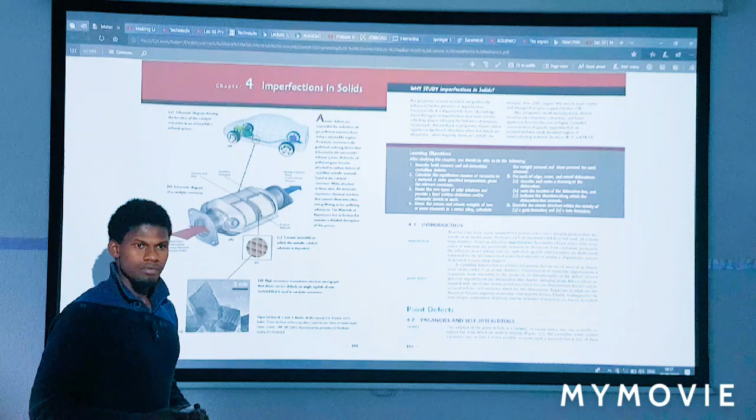Yes, and here, this is an example of what I'm talking about. We need to have control. Look at this. This is an automobile car.

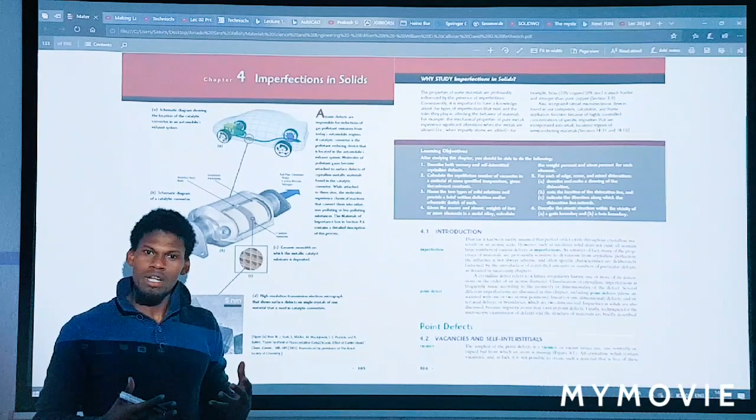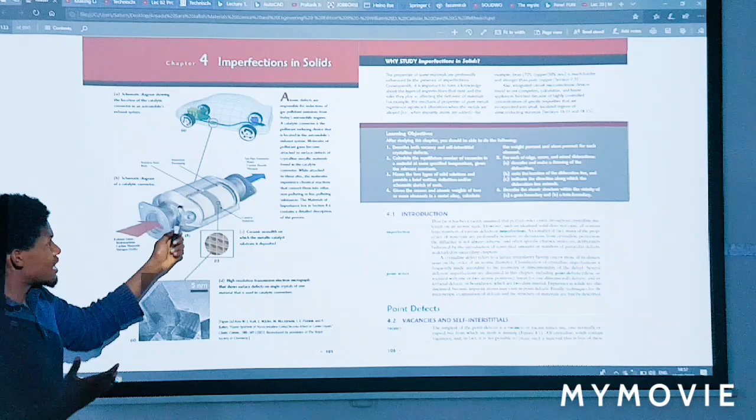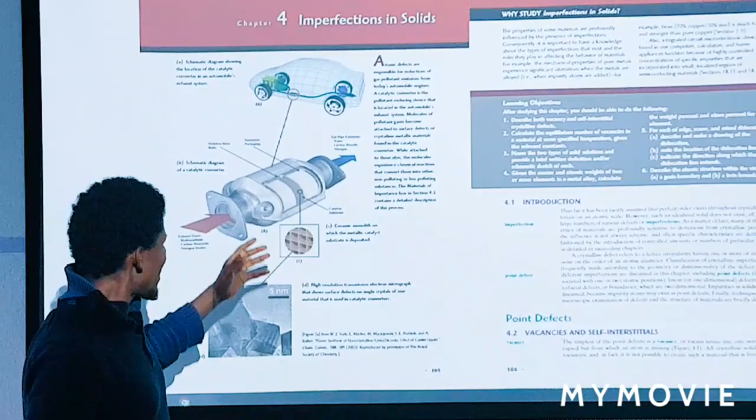During automobile use, we have a lot of gas emissions, and this climate change that we are having. Every car is producing some emission that is affecting the ozone layer. So what material scientists and engineers have done is create a catalytic converter, through the understanding of imperfections in solids, to convert these gas emissions so that they cannot destroy the environment. This is exactly what I'm telling you about. That's why you need to learn imperfections in solids, because when you learn this, you can control these situations so that we can reduce climate change.

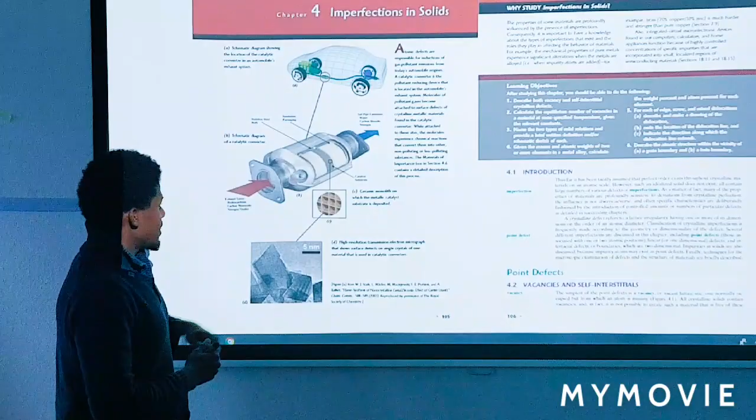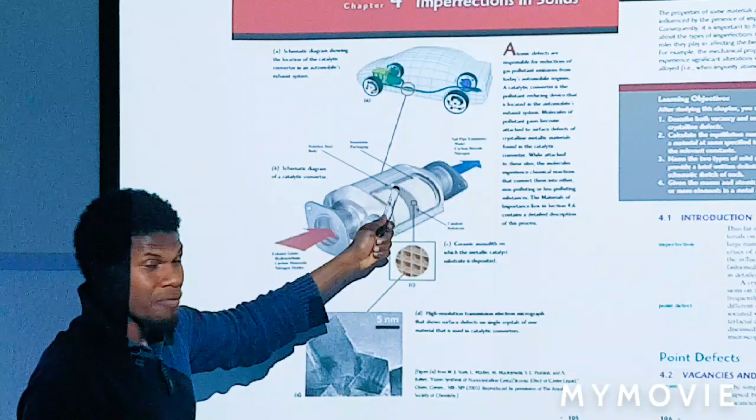Let me give you an instance. Here is the gas, the poisonous gas. Here is the car, and the gas is coming out from here. We get this catalytic converter. What materials are they made of? It's made up of steel and ceramic material. You can see that, and here is the insulating package.

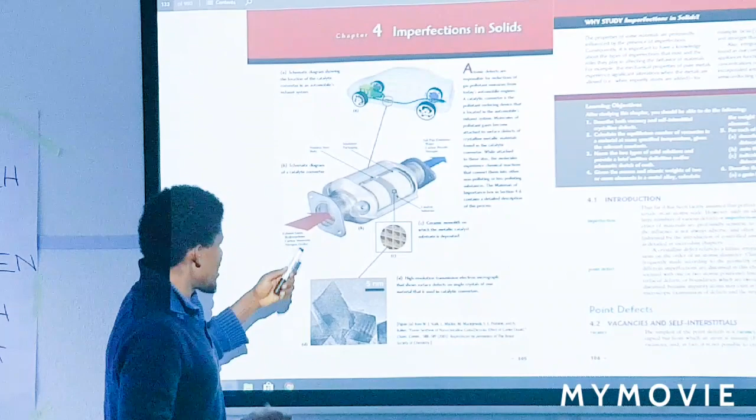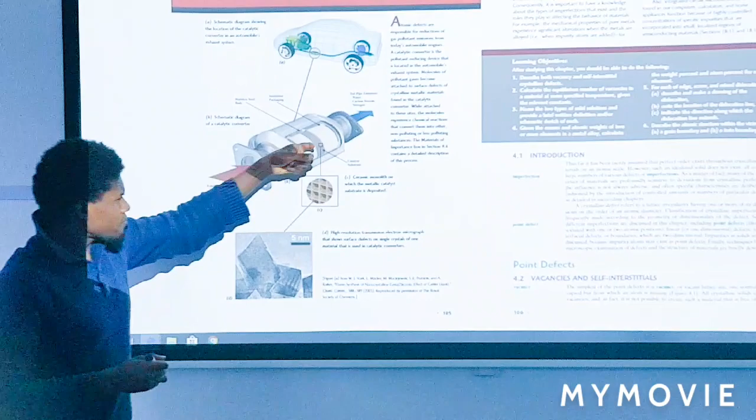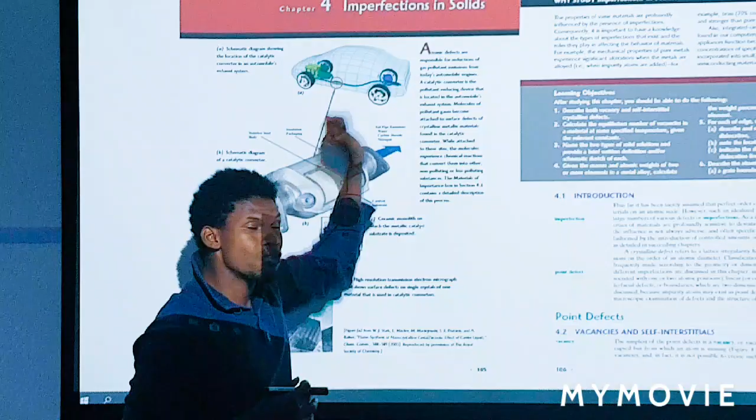So the gases, the carbon monoxide - we know carbon monoxide as a poisonous gas - and other nitrogen oxides, they go through this catalytic converter, and there they undergo some chemical reactions. The molecules of these atoms can stay here, and through this process they undergo chemical reactions. These chemical reactions are made possible because of atomic defects, which we're going to see. Then the gas comes out as water or nitrogen.

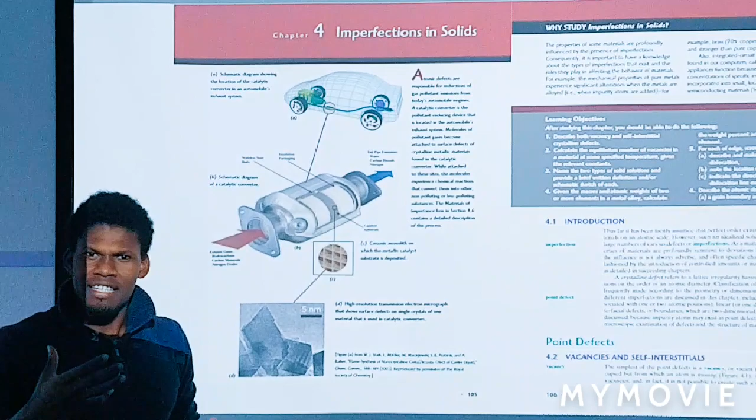So that's why when cars run, you see some little water coming out. This is the beauty of understanding imperfections and atomic defects.

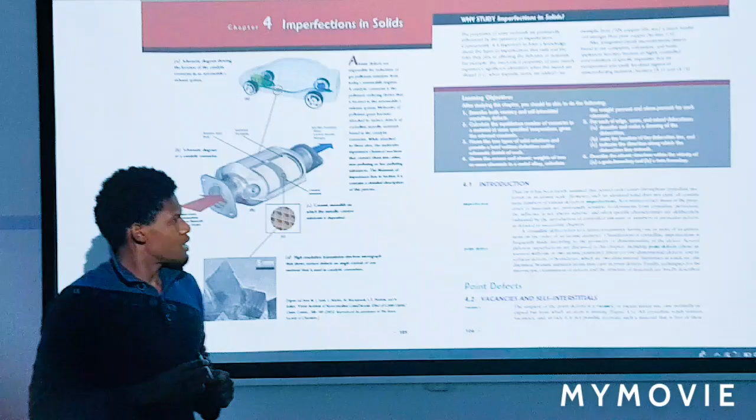Another example is in our mobile phones, computers, household machines, everywhere. If we understand, right from the atomic level, the importance of imperfections in solid materials, then we can design materials to meet our daily needs. We can control these materials. That's why we should study imperfections in solids.

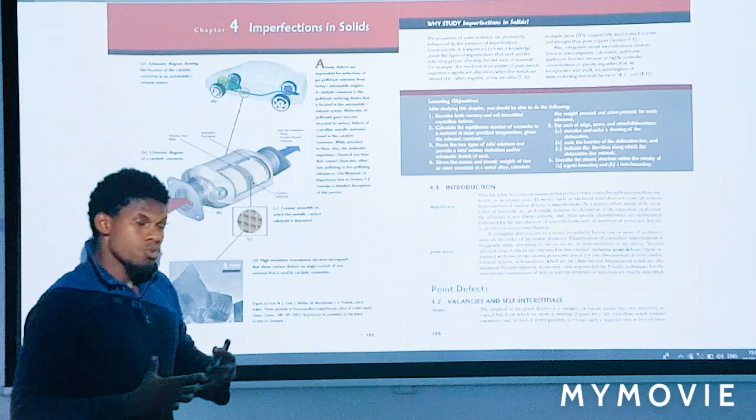These imperfections dictate the properties of materials, and whatever dictates the properties of a material, you should be able to study these properties, these structures, and how these materials perform. The only way we can manipulate this is by studying these things.

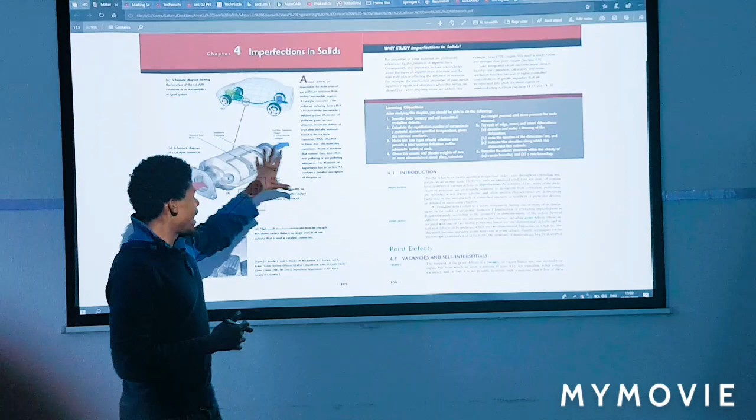So here is our learning objective. What are our takeaways? What can you take home with you when you study material science and engineering, especially chapter 4, imperfections in solids?

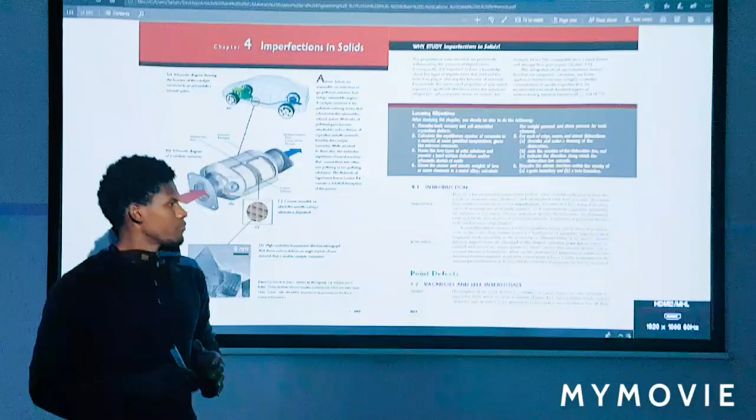Number one, you should be able to describe what vacancies and self-interstitials are. I know most of you are familiar with what a vacancy is, right? When you're looking for a job, for example, you go out there, you search for a job, and upon this job, when you are looking for a job, you have vacancies.

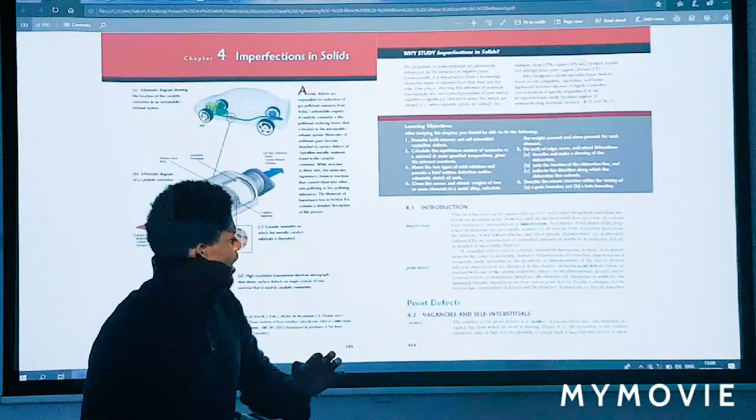All along in chapter 3 we talked about polycrystalline materials and single crystal materials, and we said that materials are perfect, but this is wrong. There is no material that is perfect without some vacancies. So we're going to see vacancies and self-interstitials, and we should be able to calculate how many vacancies are present in every material, how many defects are in there. You should be able to calculate these things, because only then can you control how these vacancies affect the properties of these materials.

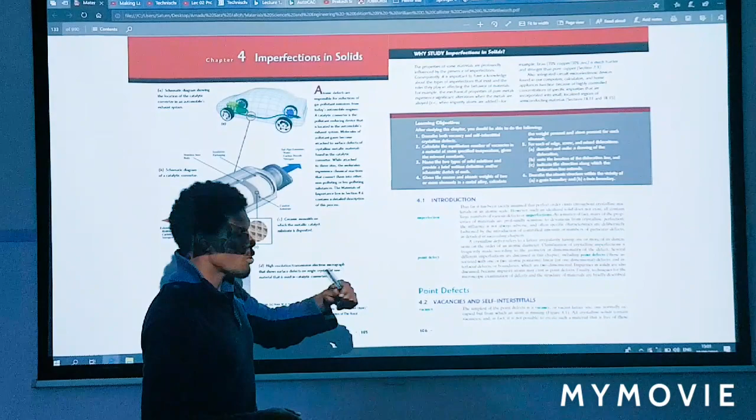So that's the takeaway we're going to take with us after we finish studying this course. Another thing is solid solution substitutions. We have, for example, a simple analogy with water.

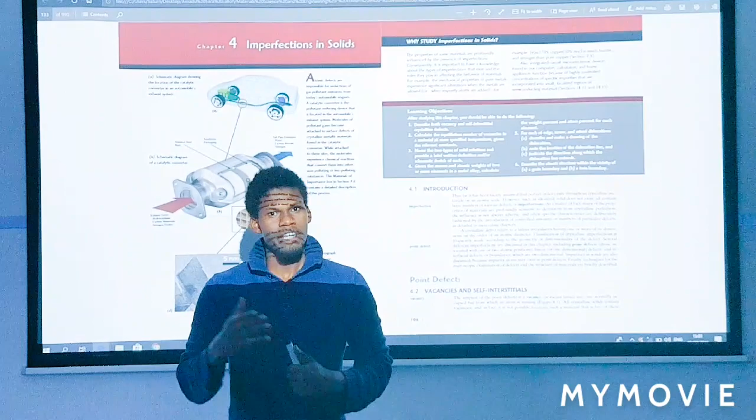If you are mixing water with alcohol, you cannot differentiate it until you taste it. Then you know that yes, there is a mixture. It's the same thing with solid materials. We can mix two solid materials, like copper and zinc, to determine that.

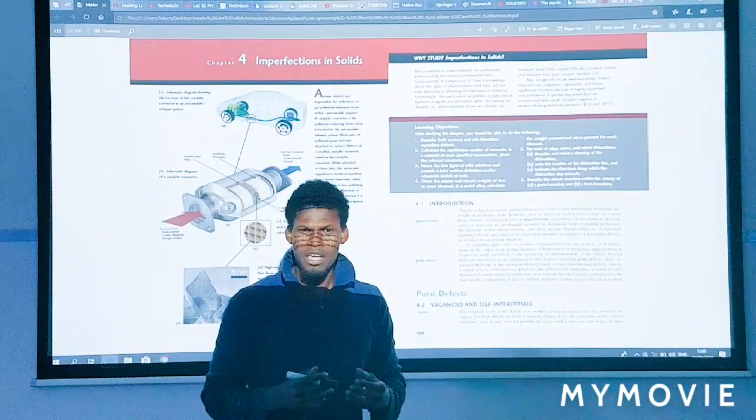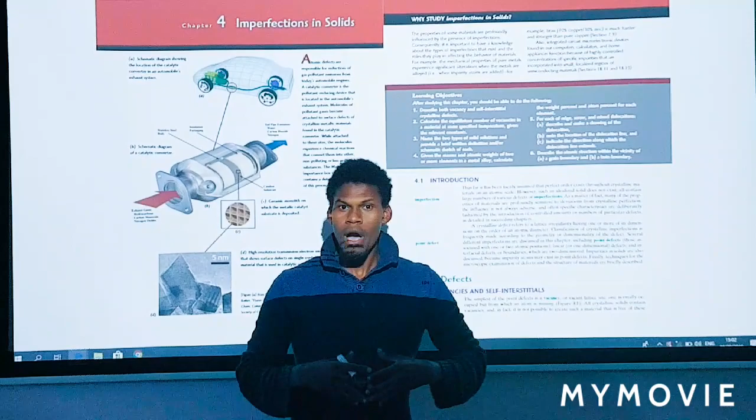Another thing will be the masses. How can you calculate these masses? It's very important. For example, if you mix copper and zinc, you want to know how much copper you have within this material and how much zinc. Because when you combine these two, you have an alloyed material. So you should be able to determine the weight, or the number of atoms that are within this material. That's the takeaway we should have.

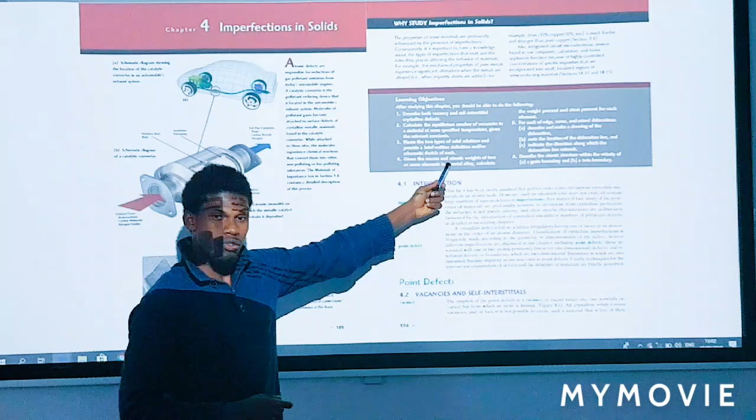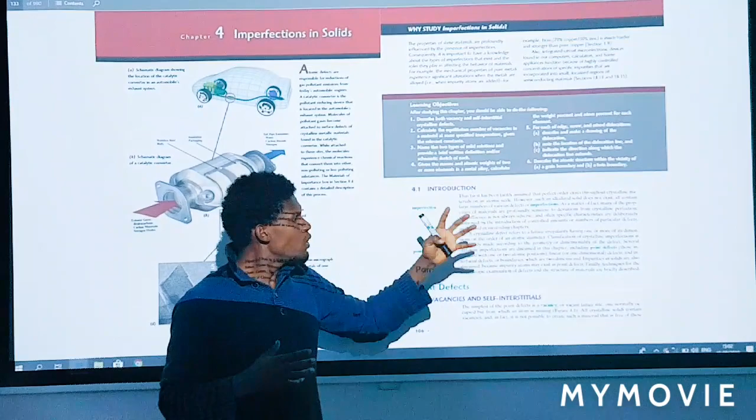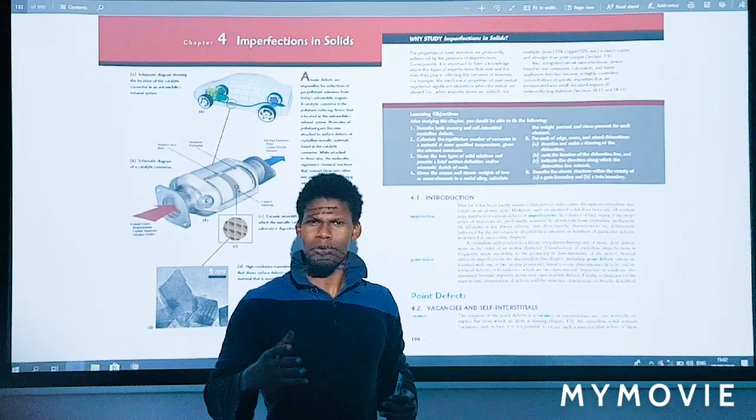Another takeaway will be defects. We have edge and screw dislocations. You should be able to calculate these things and mixed dislocations, so only then can you understand these imperfections and try to control them. We're going to talk about grain boundaries and twin boundaries. These are very important because we know as human beings we have what we call twins, right? This is the same thing that is happening in materials, so this will even help you with some analogies to understand what is happening in our life.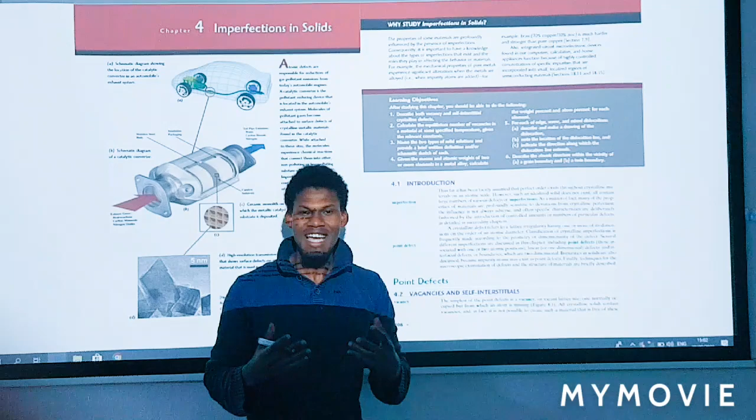Now we start with vacancies. Here is a typical example of vacancy and interstitial.

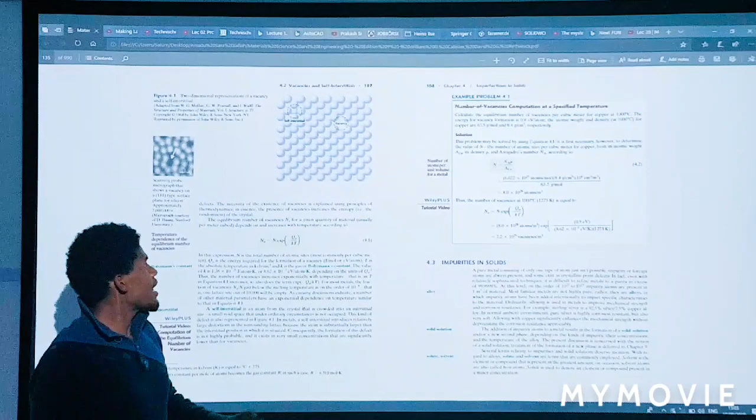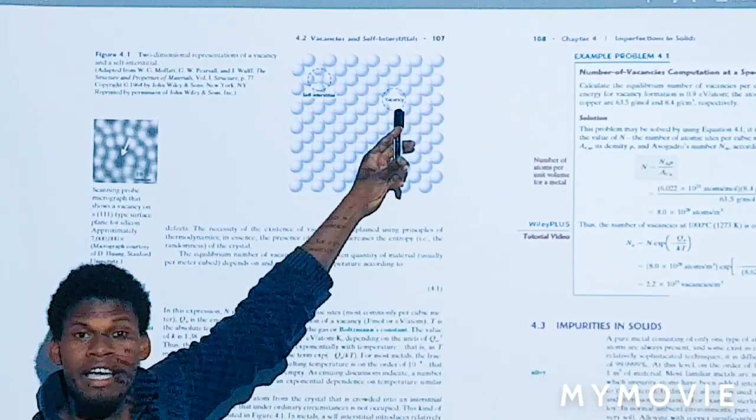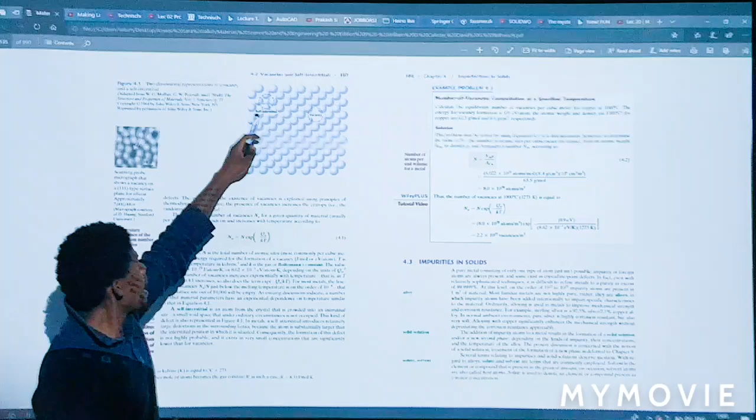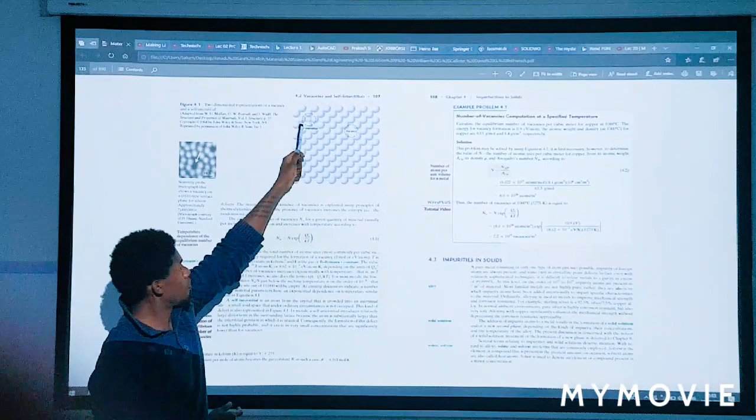A vacancy is, if you look at the atoms arranged in a pattern, but if you look at this point here, an atom is missing. So when an atom is missing, we say there is a vacancy. In some cases, these atoms you can find somewhere else. If you look here, there is an atom here that's not supposed to be here, so we call this self-interstitial. We call it self-interstitial because this atom here is the same as the other atoms, but here there is no atom where there's supposed to be one. So we say these are vacancies.

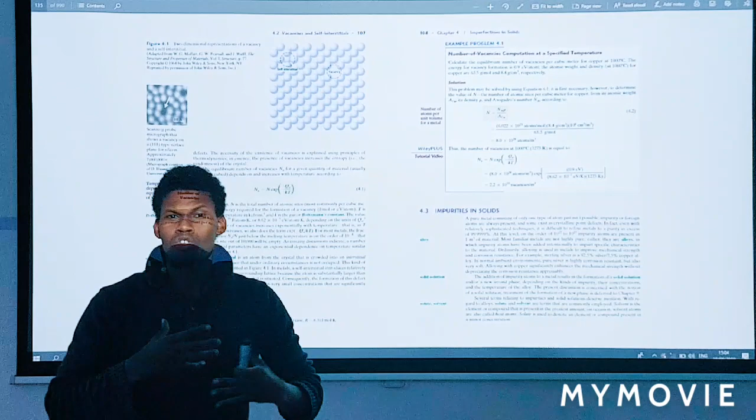Within a material, we should be able to calculate how many of these vacancies are here. So how can we do that? First, we need to come up with some mathematical equations to calculate the number of vacancies, and for this we need a little knowledge of thermodynamics. The principle of thermodynamics here is just the measure of entropy, and entropy is just randomness, how things occur randomly. With this vacancy, because the atoms are vibrating, an atom will try to occupy this space, and when an atom comes here, the vacancy will move over there, and so on for the next atom. So we can calculate these vacancies.

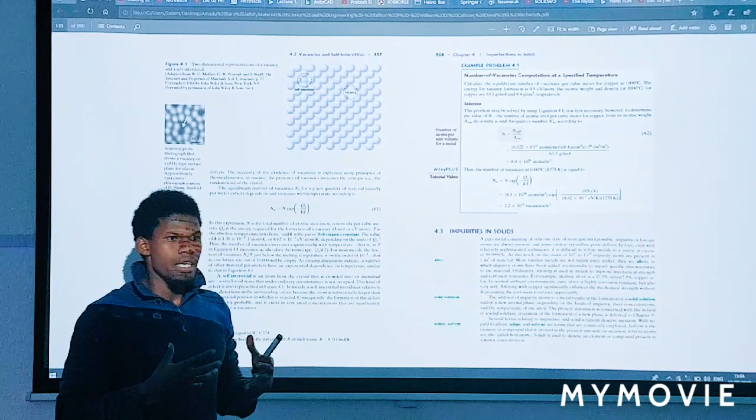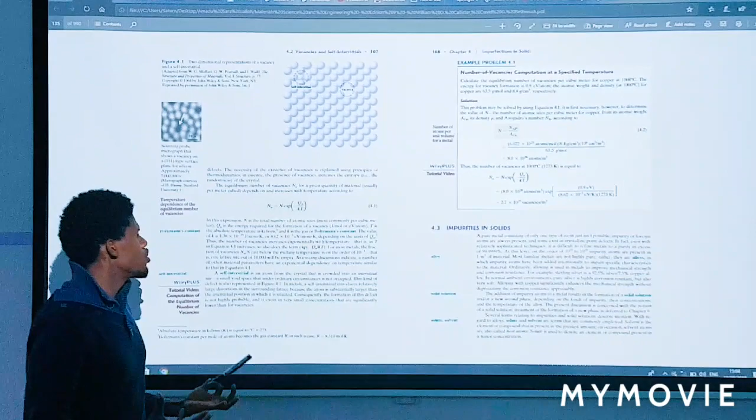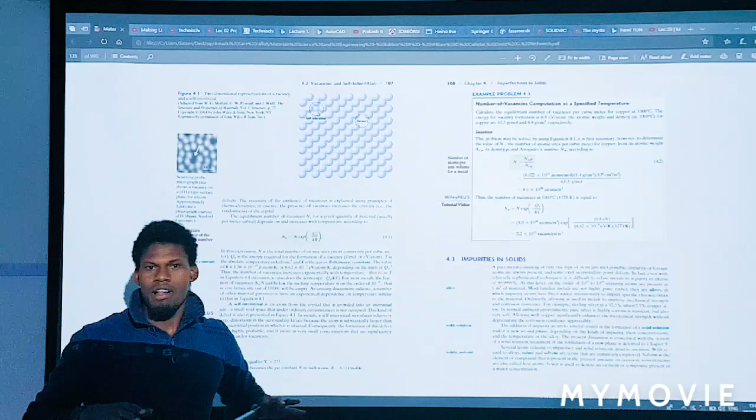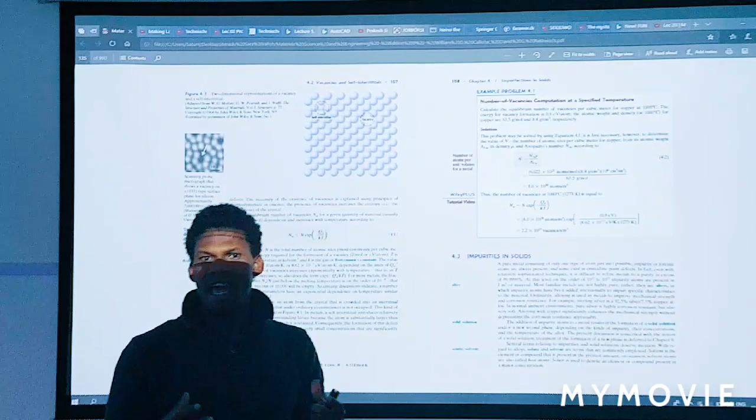That way we come up with a formula mathematically, and this is a very simple formula. To calculate the number of vacancies within a material, all you need is the number of lattice sites under normal conditions, assuming the material is perfect. Then you have the exponential value of QV over KT. QV is just the energy required to remove one atom from the lattice site, measured in electron volts, and K is the Boltzmann constant, which we can talk about.

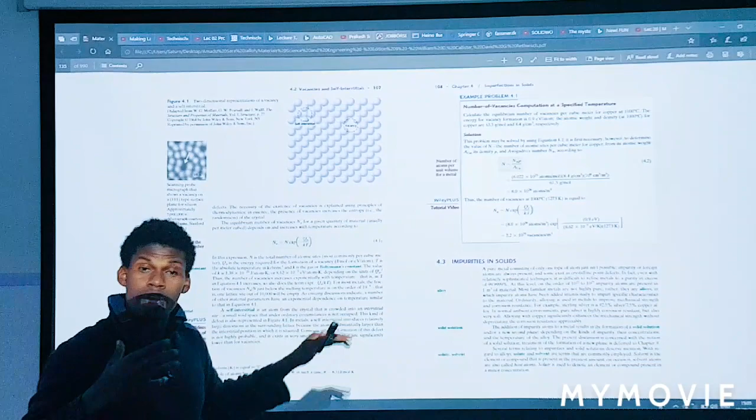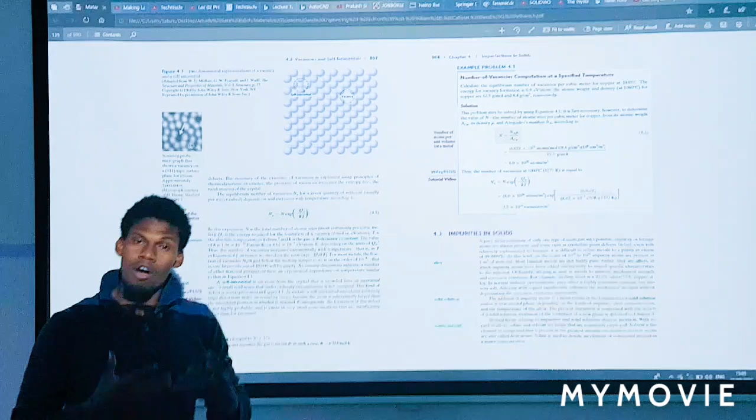But the purpose of this is not just to memorize these things, but to be able to come up with them. Assuming you are in the middle of the forest and you happen to have copper and zinc, you should be able to come up with these calculations to determine what percent of copper and what percent of zinc is there, and how many vacancies are available. That's exactly what we are doing here: calculating the equilibrium number of vacancies of copper. And of course, the temperature is very important. At what temperature?

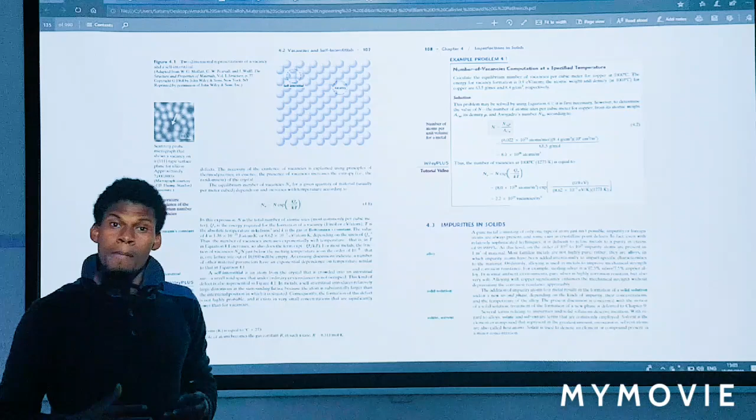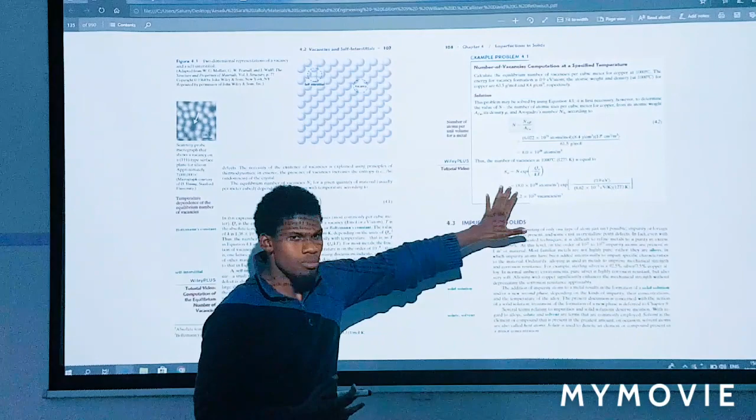Because we know that when the temperatures are higher, we have a higher degree of randomness. This is the mathematics, but we are not going to worry about it today. We just want to understand the basic concept of imperfections in solids.

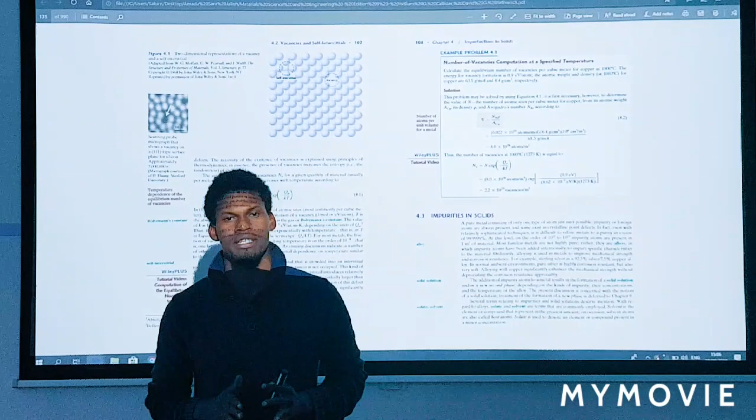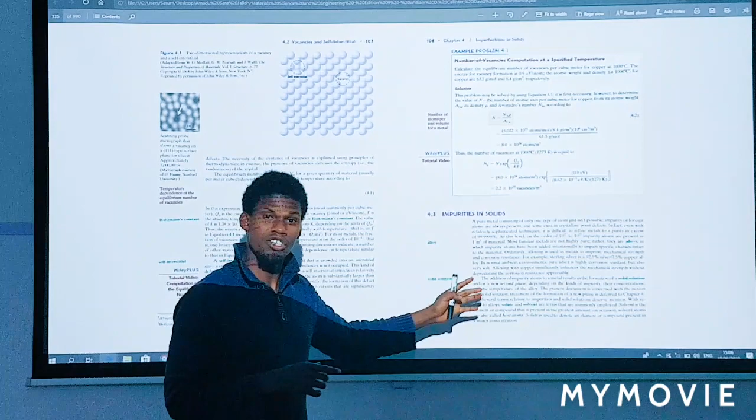We talk about solid solutions, solvents, and solutes. When we have, for example, zinc and copper, you should know which one is the solute and which is the solvent. If we have a complete material in copper, say 100%, or 99.9999%, because you can never have a material that is 100% pure. You can have material at 4 decimal places percentage purity, which is as far as we've managed, though sophisticated technologies may help achieve more pure material.

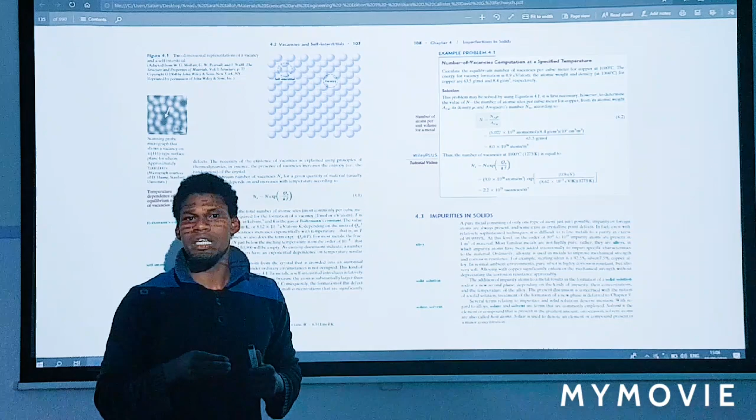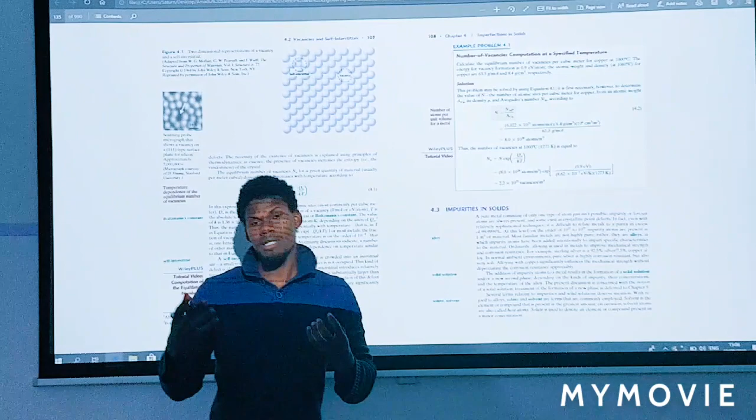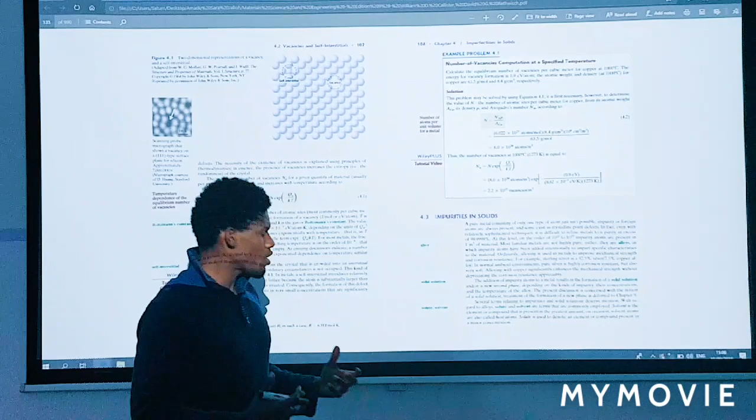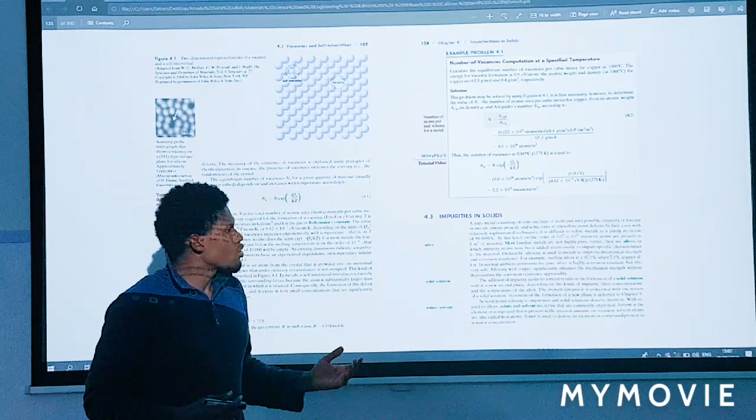But pure materials are always soft. So if we want to enhance the mechanical properties, we need to deliberately put some other atoms of other material, impurities, within this material, and then we take zinc. If we have 70% copper and 30% zinc, the material becomes much stronger compared to pure copper, which is weaker. So copper here will be the solvent, and zinc will be the solute. This we call brass today, which is 70% copper and 30% zinc.

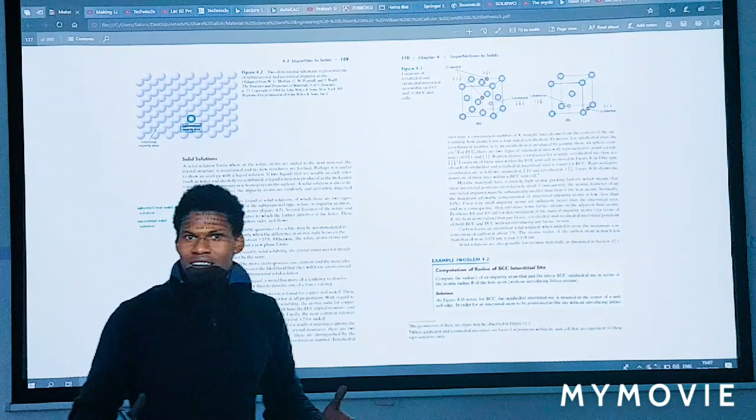And we have some rules. If there are no rules, nothing exists. We should have rules, and exactly in material science and engineering, we also have some rules. We talk about the atomic size factor, how big the atom is.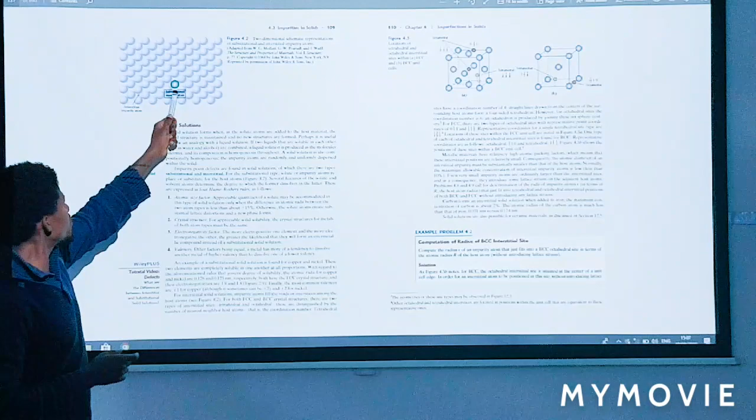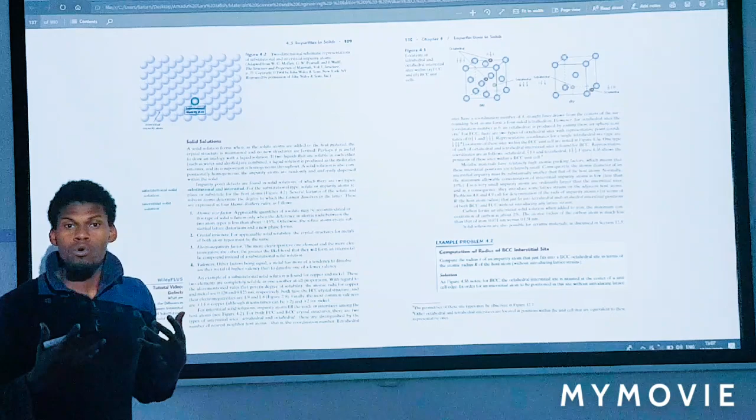Suppose here you see this atom is green, but the other ones are blue. This can substitute for these other atoms. Why? Because the sizes of the atoms are the same. So we call this a substitutional solid solution, because the size of the atom is the same.

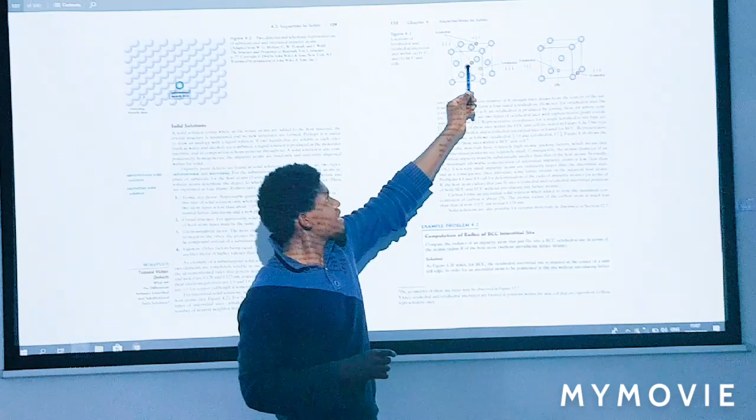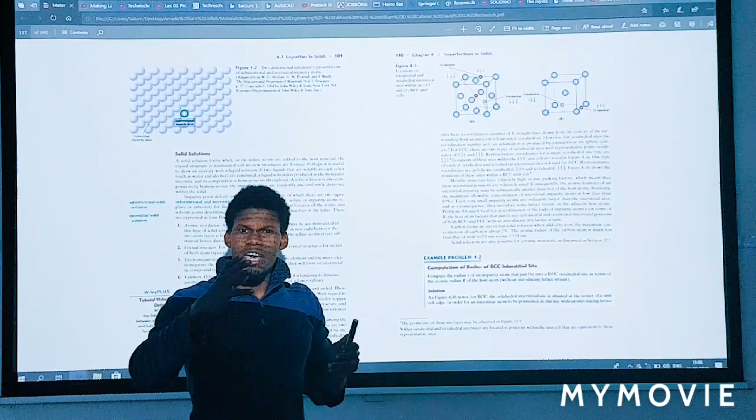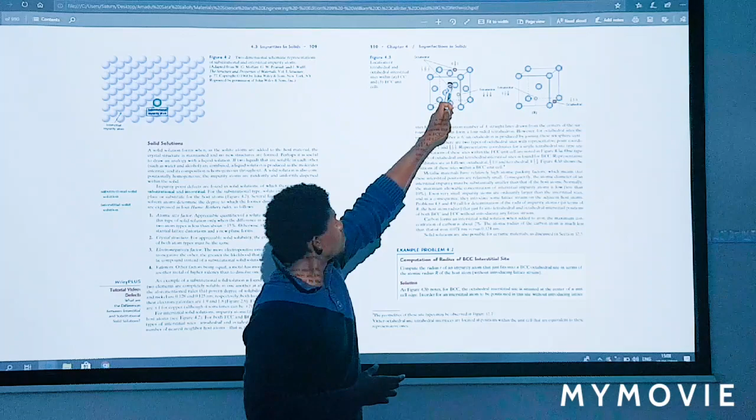But when the sizes of the atoms are different, for instance here you can see these are much bigger than this, we call this an interstitial solid solution. So atoms are occupying an interstitial position. Remember when we talked about FCC and BCC crystal structure. This is an FCC crystal structure. Look at where the atoms are residing, at the corners. And when atoms reside here in FCC, we say these are octahedral and these are tetrahedral positions.

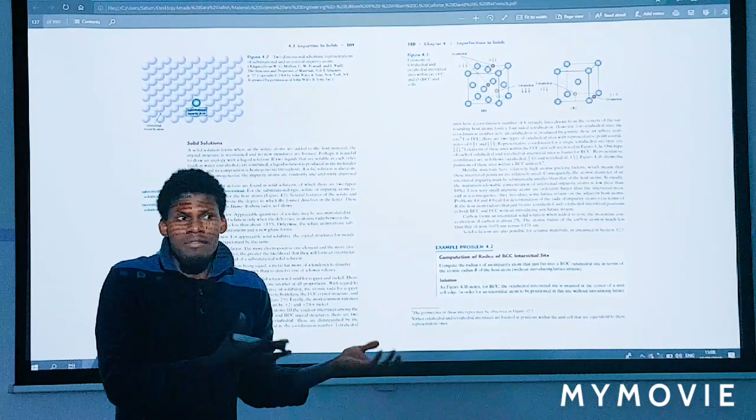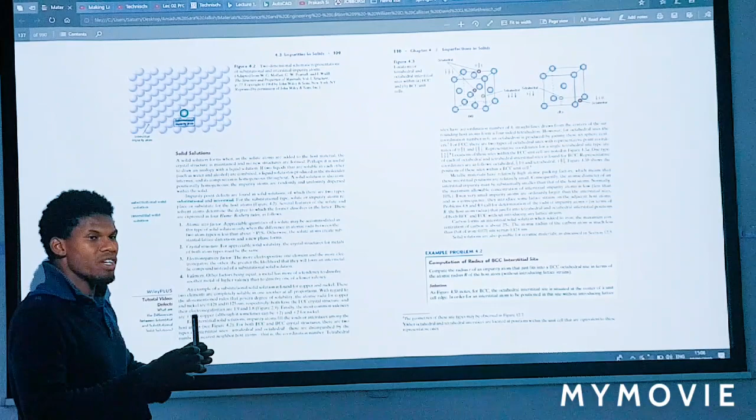With the crystal structure, if the element copper has FCC and the other material has another crystal structure, then it's not going to work well. There will be some lattice strain. So to avoid those strains, we ensure that both materials have the same crystal structure.

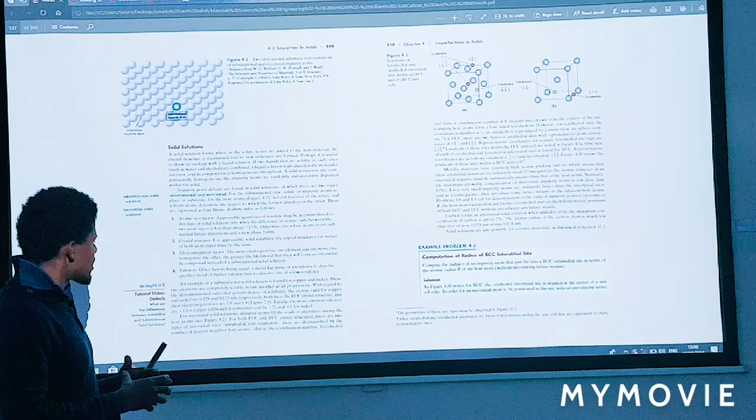Another rule of thumb is electronegativity. We want to ensure that these materials have the same electronegativity, and also the valencies, the number of valencies present in the material. These are the things we use to calculate these properties, and of course, the specification of compositions.

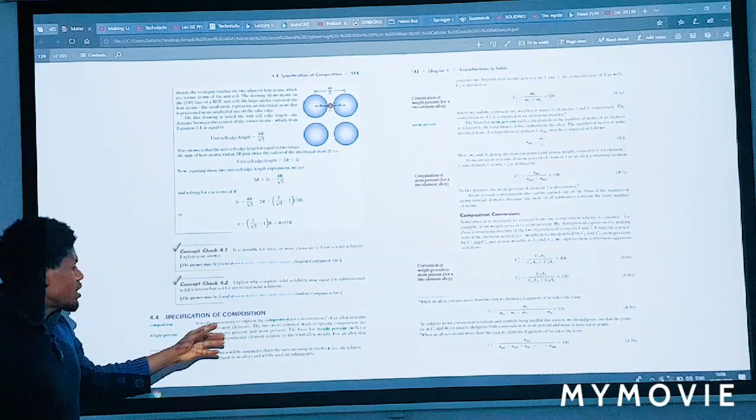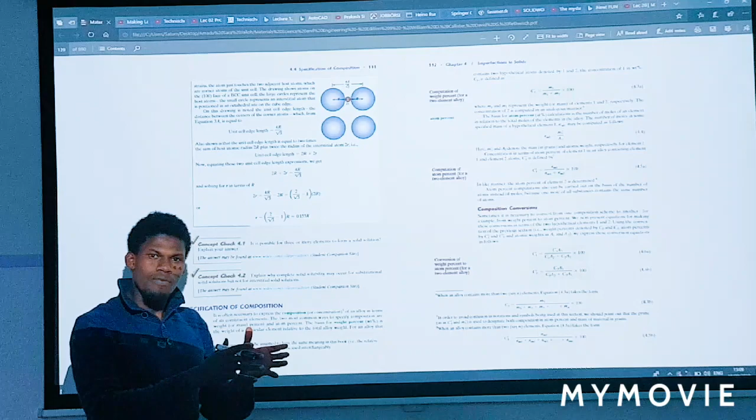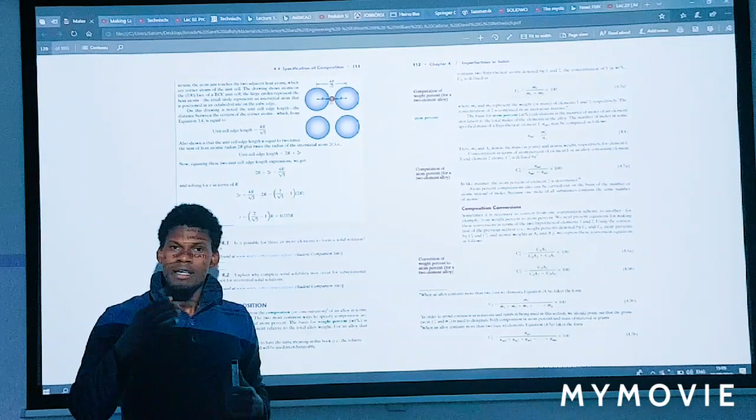I'm going to leave the mathematics for now, just so we understand the concept, because once you understand the concept, the mathematics becomes easy. This is just to calculate in terms of atom percent and weight percent. When you're able to manipulate this to convert from atom percent to weight percent, or weight percent to atom percent, you can know how many copper atoms are present within the totality of the material, or how many zinc atoms are present there. So we can express composition in terms of weight percent, which we have here, or in terms of atom percent, which we have here.

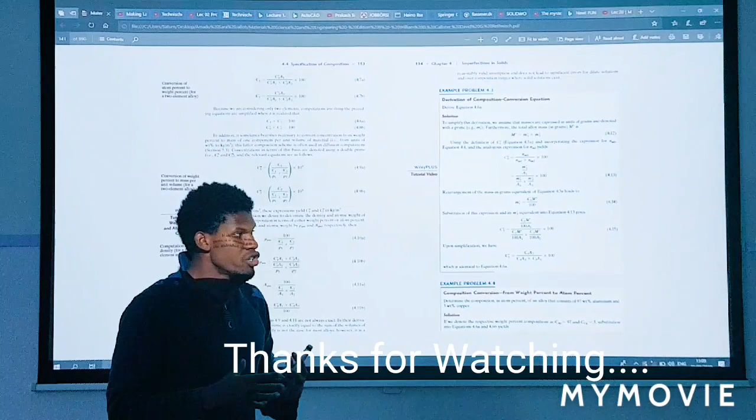So we're going to stop here for today. Next, we're going to see how dislocations and linear defects affect materials. So take this course seriously, and go over these things.